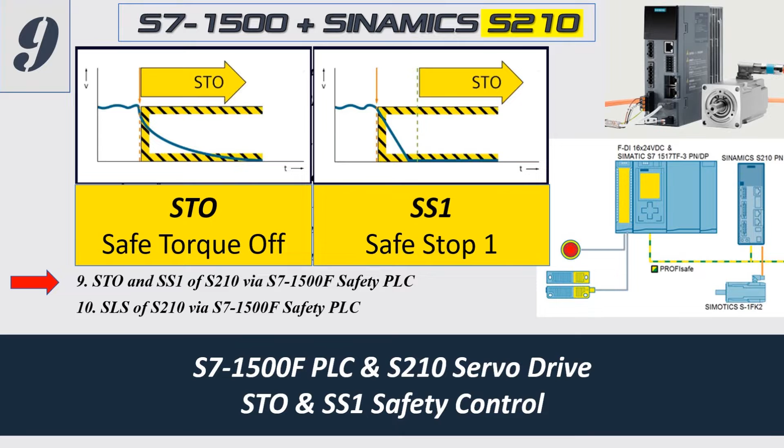In this video, I will show how we can implement the safety functions STO and SS1 for the servo drive SINAMICS S210. I will use the safety controller CPU 1511TF, a technology controller with built-in F safety.

I will use the e-stop button and the gate switch, these two different inputs, to connect to the STO and SS1 functions to control the SINAMICS S210 servo drive. Okay, let's start. So this is the demo I'm using. In this demo, I have the 1511TF controller, and I have one 1500 safety input card.

This safety input card has two inputs. One comes from this mushroom e-stop button, and one comes from this gate switch. On the right side, I have two servo drives, and I will use PROFIsafe communication to implement the STO and SS1 functions. So firstly, I will configure the safety card, which will read from the e-stop and the gate switch. Okay, let's go.

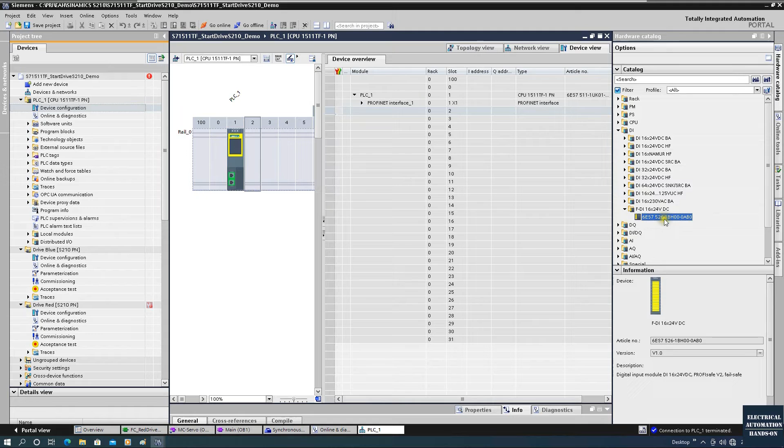On the right side, I will find the safety module. Go to the digital input and find this 16-channel safety card. This module is the 526-1BH00. I will drag it here. After I drag it here, we will see this card's address from 0 to 8. It includes 9 bytes.

That's because for the safety card, rather than just the standard signal, it also needs to communicate with the controller to exchange the status of the safety inputs and outputs. Its actual inputs include 16 inputs, from 0.0 to 0.7 and 1.0 to 1.7. Okay, then let's configure this card.

To configure this card, we really need the hardware wiring, so we need to understand the safety circuit. I will briefly introduce this. In this system, I have the e-stop and the gate switch. For the e-stop wiring, the test signal comes from US0 and goes to the e-stop. Then the signal from the e-stop, one channel goes to pin number 2, DI0, and the other goes to DI channel 8, pin 22.

That's why you see the blue and the dark gray. So this is the e-stop: the signal comes back from the e-stop button, but the test signal comes from US0. Then the gate switch internally works similarly to the e-stop. The gate switch used in this demo does not supply the OSSD function; it just works as a simple switch. So the test signal is connected to pin 11, which acts as the test signal source.

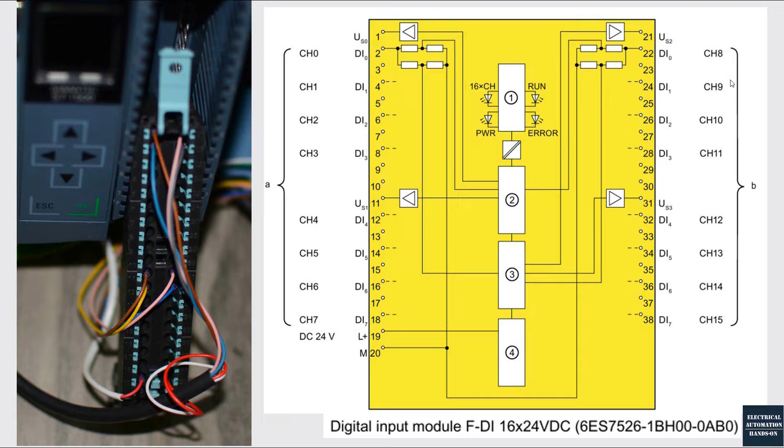When the signal comes back, it has two channels. One goes to CH4, one goes to CH12. So channels 4 and 12 are used as one group, but the test source comes from US1, test 1. For the e-stop, the test source comes from US0, and channels CH0 and CH8 are used as one group. So keep this in mind. Now let's go back to the configuration.

Let's double click this card and go to the safety properties. Let's first look at the channels here. For the input, it has 4 sensor supplies, which represent pins 1, 21, 11, and 31. Let's look at sensor supply 0. Sensor supply 0 serves channels 0 to 3. This has short-circuit testing, and we can activate it. Pin 1 at the terminal will supply the power.

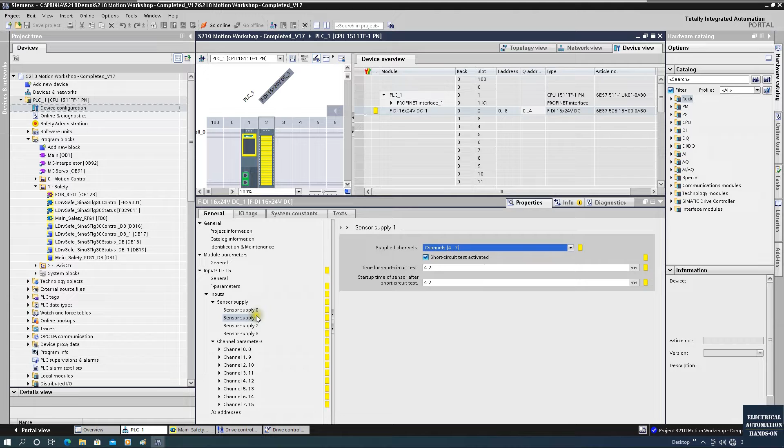Then for the second one, sensor supply 1 supplies channels 4 to 7. We activate it because we will use channels 4 and 12. But sensor supplies 2 and 3 we can deactivate, because we are not using them. We are only using supply 0, that's pin 1, and sensor supply 1, that's pin 11. Then let's go to the channels.

The first group is channel 0 and 8. Channels 0 and 8 both come from the e-stop button, but through two individual channels. To evaluate these two channels, the common way for receiving the e-stop signal is 1oo2 evaluation, equivalent. For the discrepancy behavior, we can supply the value 0; this is the common way. We can increase the time in cases where the two channels from one e-stop button cannot react exactly the same.

It has a slight discrepancy there, and this is reintegration after the discrepancy error. So usually we leave the test signal as 0, not necessary. If in the system it is very important, depending on the SIL level, in some cases you need to select this. You can leave the mouse here and you can read the help for this explanation.

Okay. And for the individual channels, we can see we activate channels 0 and 8. And the input delay is 3.2 to get rid of some noise. Channels 4 and 12 are connected to the gate switch. They are not OSSD signals. We can see channels 4 and 12.

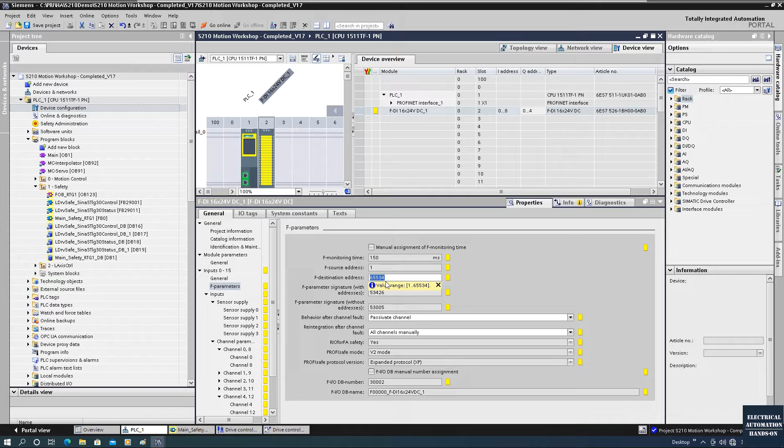So we double check this F address here. After we configure this and download while we are online, don't forget we need to right click this module and click assign PROFIsafe address. That means we will assign this address to the card. We can leave this address here. Now we can save and compile, temporarily, to see if there's something wrong with this safety card configuration.

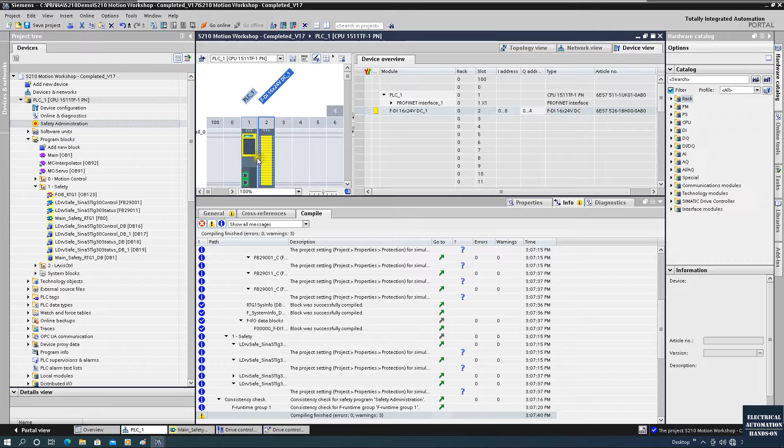As we can see, it needs time to compile. After it compiles, we will see the system automatically generates the safety administration. That's because before, the CPU basically ran as a standard CPU. Once it has this safety card, the CPU will automatically assign all the sub-function blocks serving the safety. And if we double click the properties and go to PROFIsafe, we will see F-activation is enabled. Then all those things will be automatically assigned. Okay, we finished the compile.

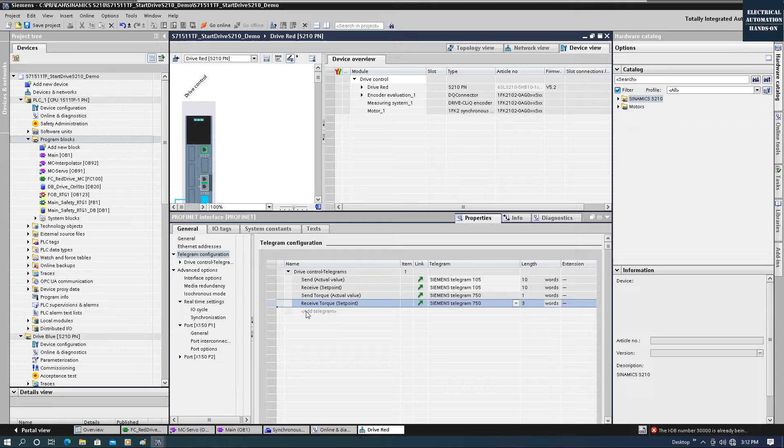Now let's go to the drive. Double click this drive station, click PROFINET and click properties. In the previous video, I showed how to add Telegram 750 for the torque. To add the safety function, we still need to add the telegram for the drive. Here we can double click and we'll see add Safety Integrated telegram. This is the standard safety telegram that includes a lot of safety functions already. So we can click this.

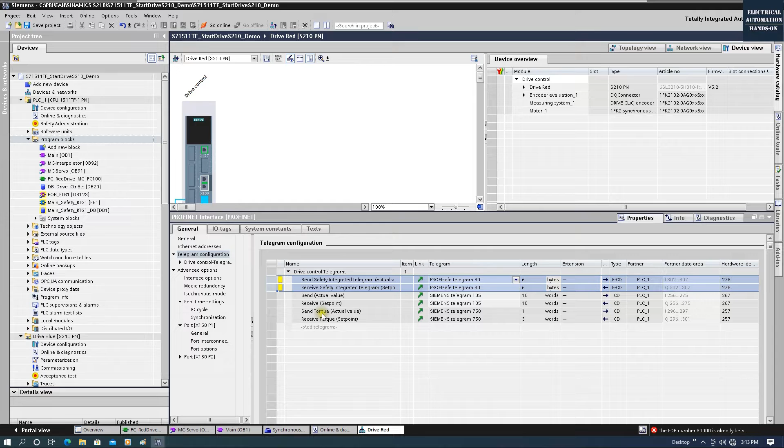In most cases, this standard safety telegram is enough. This telegram number is 30. It includes 6 bytes input and 6 bytes output. And we can look at the right side here. This is the safety input and output. It starts from 302. And then let's go to the blue drive.

Click this, and for the blue drive I can add the safety. For the blue drive I didn't add the torque value, which doesn't matter. So we can add Safety Integrated telegram 30, and we will see the system assign 308, input and output 6 bytes. We add it here, and then let's go back to the safety. Currently, the standard program and the safety program are together.

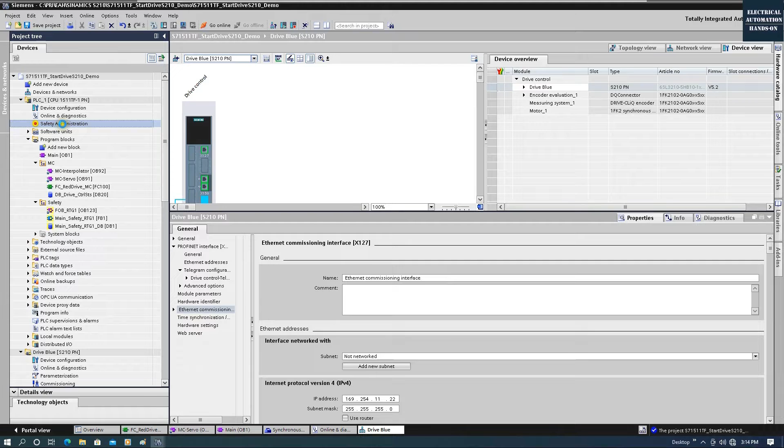Personally, I recommend we create 2 folders. We can add a new group and call it motion control, and drag all the motion control to this folder. And I will create another folder named safety and drag all the safety program here. Basically this FB1 acts as the main program for the safety program. If we double click this CPU safety administration, we can see the safety organization block is 123.

And 123 automatically calls the FB1. And the DB1, this is the safety DB. All those things are automatically assigned by the system. Okay? And you do not need to specially call this FB1. For all the safety program, you can just directly go into this FB1 and start programming here.

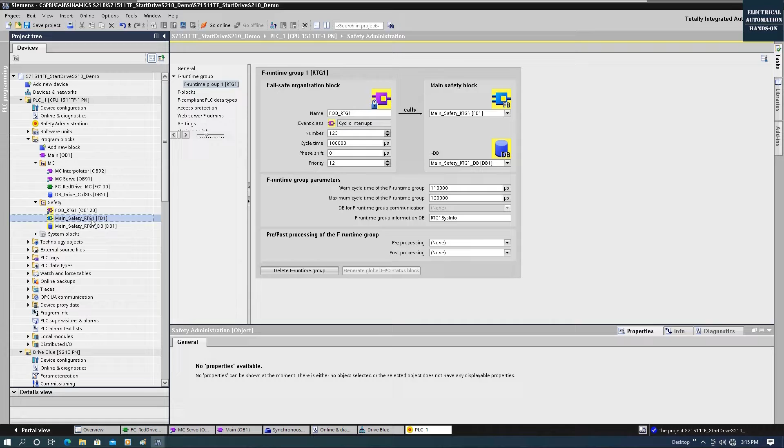By default, the FB1 is in the FBD language style. So we can go to the properties of this FB1 and change the FBD to ladder logic. Okay, and click OK. Then we'll see the FB1 is in the ladder logic style. Okay, now basically we've finished the hardware configuration.

So let's first download this controller, and we need to assign the safety address for the safety card. Okay, compile and let's download. Let's download and let's start. All right, after this, let's go to the hardware again. Then let's find this safety card. Right click, click this assign PROFIsafe address.

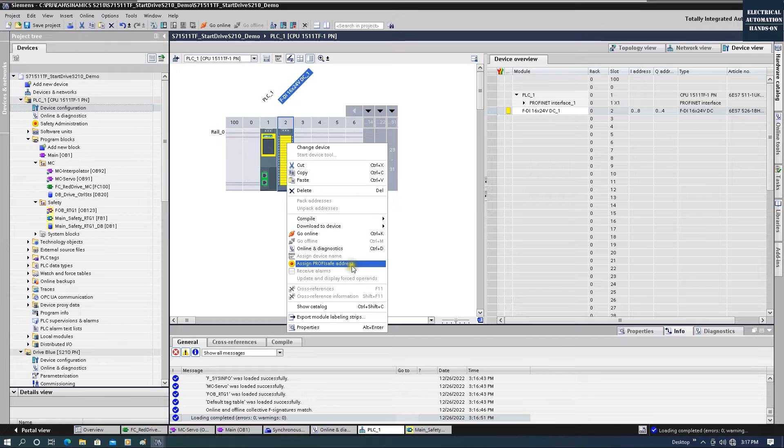Okay, so we will see. We can click this identification. Because I tested this card already, it assigned this address already. If this is the first time, then you can click this identification and find the card it's supposed to be, and click confirm and click assign. Keep in mind, you need to assign this.

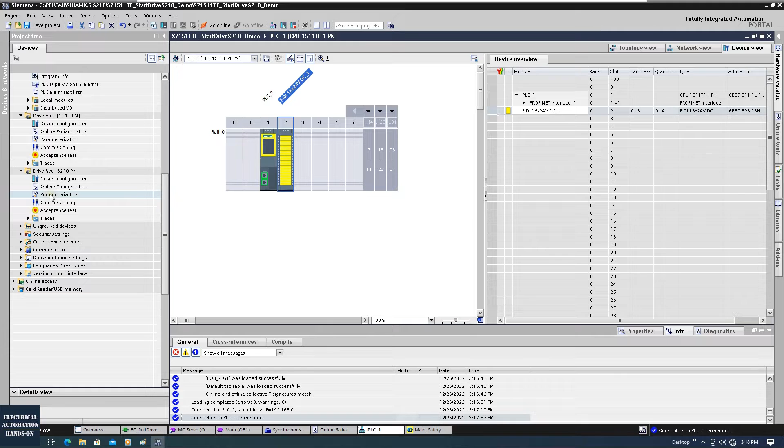Okay, and after we assign this, then we need to go to the drive and also activate the drive STO and SS1 function. Let's go to the drive. Okay, let's first go to the drive. Double click this parameter and go to Safety Integrated. So now I'm using Startdrive.

Actually, you can also use your web browser to browse your drive, this SINAMICS S210, and then use the web browser to activate the safety. They work the same way. Okay, so here I will use Startdrive to configure this red motor, and I will use the web browser to configure this blue one. Okay, here let's double click this parameterization, go to Safety Integrated and click here,

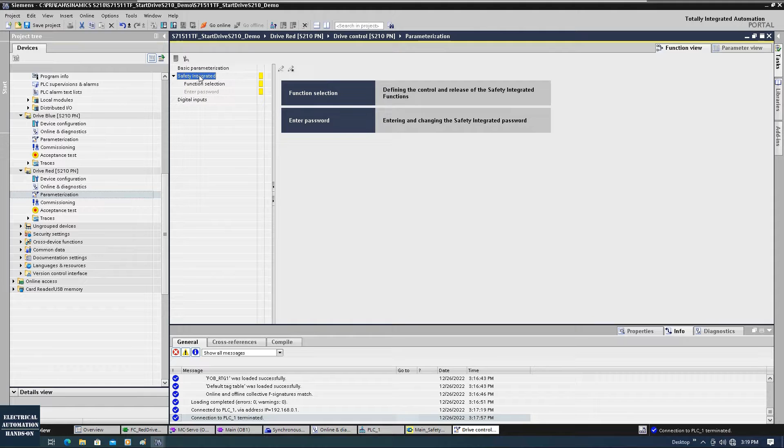and then let's click go online. While we're working in Startdrive, for the Safety Integrated configuration, we are configuring this drive online. So now we can click edit. Okay, click edit. By default, the safety is disabled. So let's go here, click basic functions.

We will first implement the STO and SS1. STO and SS1 belong to the basic functions. They do not need any additional license. This is a built-in function. We just need to enable that basic function. Okay. And we are using PROFIsafe.

If you are using the onboard terminal, as I introduced, the drive has two-channel safety input, so you can use the onboard terminals. But in this case, I'm using the safety controller, this F controller, so I'm using PROFIsafe and the STO and SS1. So now we can click this button to jump to the configuration.

As we can see from this chart, the key difference between STO and SS1 is this. STO is very easy to understand: safe torque off. Once the safety signal command goes from on to off, basically we press the e-stop or open the gate, then the torque will be off. But while the torque is off, the drive will coast down freely by itself. For most applications, we do not want this. We want a safe immediate stop, meaning the system controls the motor to stop as quickly as possible.

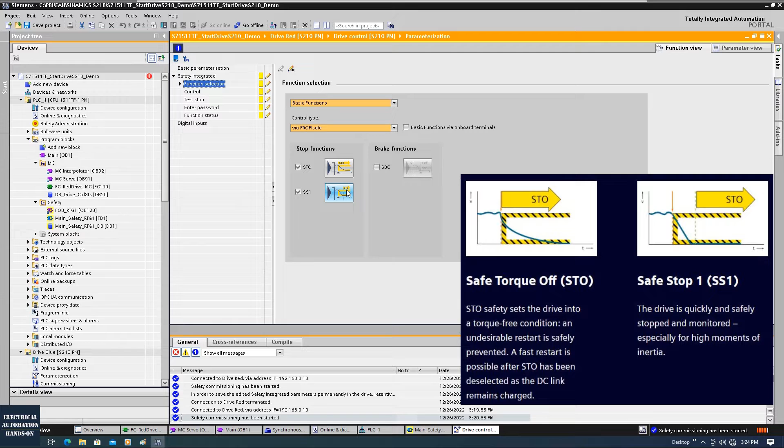This feature belongs to SS1. SS1 works like this: first, for a short moment, the system will stop the motor as quickly as possible, and then it will switch to STO and shut off the torque. As we can see, this controlled speed ramp-down is a short moment. So once we go to SS1 here, we will see there's one setting.

This setting basically means how long a time we assign to do the immediate stop. For example, we can set 0.5 seconds for the immediate stop. This 0.5 seconds works for the SS1. After the SS1, it will do the STO function, torque off.

Usually we leave a short period, basically half a second or 1 second, depending on the moment of inertia of your load. If your load is very heavy, you probably need a longer time. If your load is very light, you can set even 0.1 or 0.2 seconds. Again, this time is for SS1 to immediately stop. After this time, it will apply STO, safe torque off. Okay?

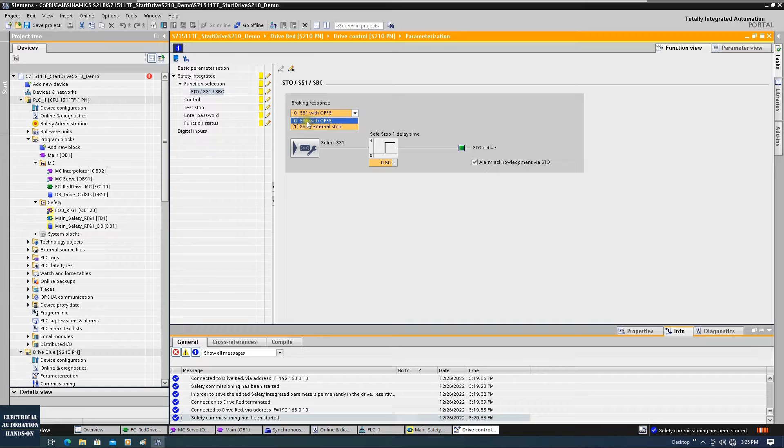Okay, we can see this selection. We usually leave it at 0: SS1 with OFF3, immediate stop. Okay, go back to here. So actually, once you click this STO or this, they both go to this option. So no difference. All right, then let's go to the control and quickly review.

This means if the communication fails, what should the drive do? It should do the STO or do the SS1. In some cases, if the communication dropped, the drive should immediately stop. Otherwise, that means we totally lose control, right? So I personally recommend that we do the SS1, to make sure that if the communication drops, the drive immediately does the SS1, the immediate stop.

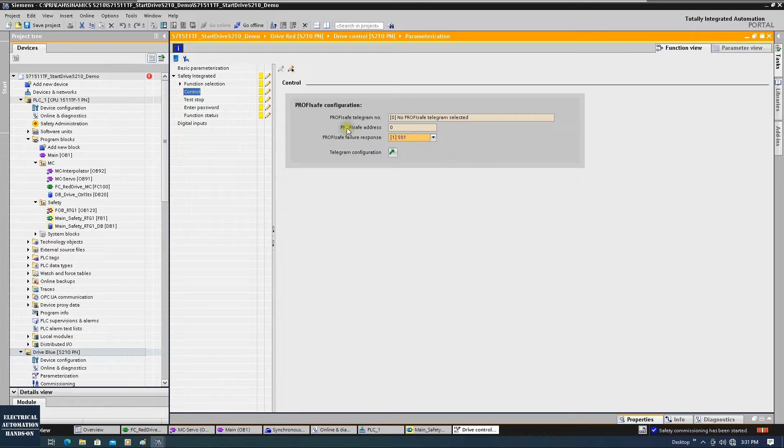Okay. Then there's one address you need to be very careful with, this PROFIsafe address. By default, that's 0, and it comes from P9610. Okay, you'd better write down P9610. This is the PROFIsafe address. So where does this PROFIsafe address come from? If we click this button, Telegram configuration, it actually jumps to the hardware configuration where we configured this Telegram 30.

And under here, if we click this send and receive with the red and yellow mark here, we will see the system assigned this address for the red motor, that is 1. Okay, so ideally this PROFIsafe address should be 1. I will download this station afterwards to make sure this 1 is written into the drive, or we can manually change this address in the drive. Okay, so this red motor needs to be 1.

So we could go to the parameter view and find P9610, this address. Okay, this is the red drive, so we can change this 9610, the safety address, to 1. Okay, so we change this online, and once we come back here, we will see this PROFIsafe address has changed to 1. Now we find the telegram at the top is still showing 0. So we need to change this telegram to 30 also.

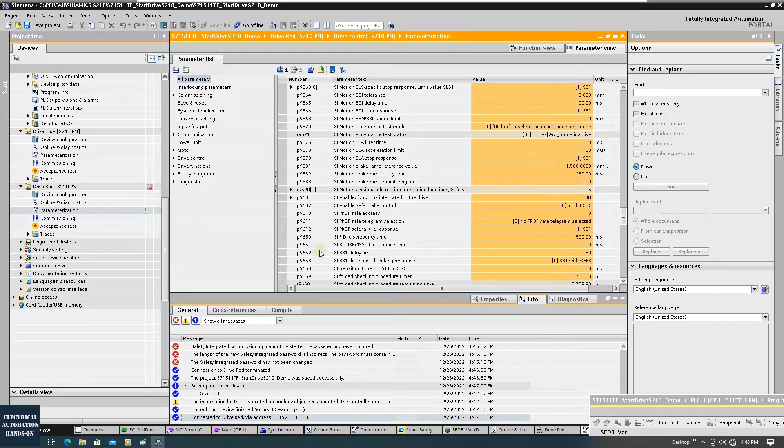So let's go to the parameters and find 9611, and change the telegram to 30. But by default, we cannot directly change P9611. We have to go to P10 first and change P10 to 95 to make the safety commissioning mode active. So let's go to P10 first, change P10 to 95, and then go back to P9611 and change this telegram to 30.

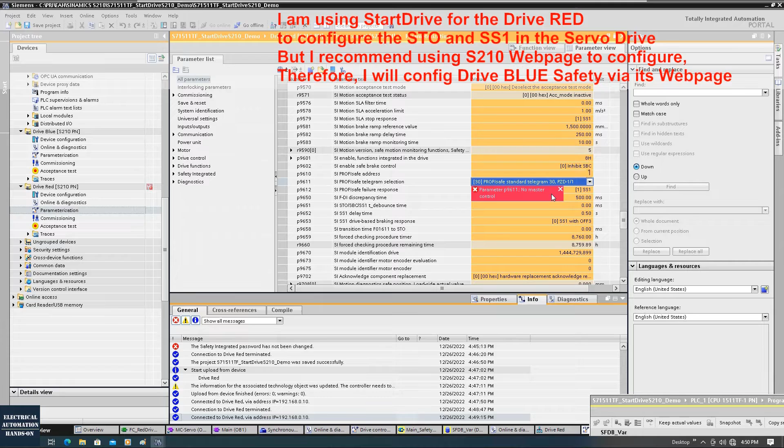After we finish P9610 and 9611, once we come back, we'll see online it changes to telegram 30 and the address changes to 1. The test stop: this is the time, a counter behind to check. During this time, if no safety stop happens, after the time expires it will force you to do a safety test to check that the safety is still working properly. This is basically a safety standard behind it. So you can leave a couple of weeks or 1 year, one test needed each time. This depends on what your application requires.

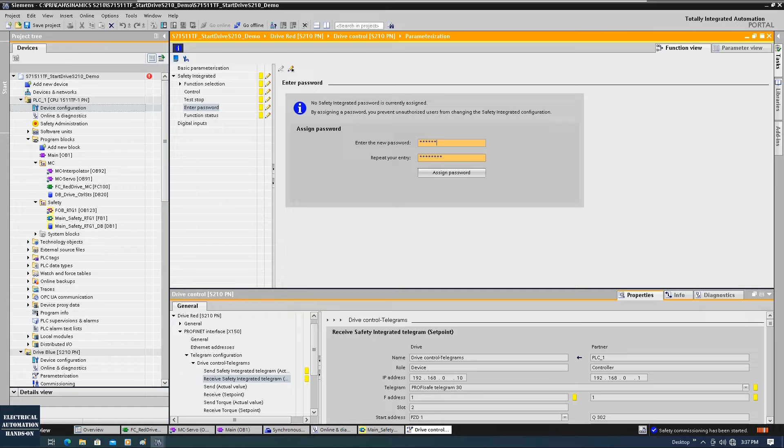Okay, so 8,760 hours here for the test stop. Password. In some cases the drive will force you to type in the password, and personally I also recommend you write down the password and set the password here. So I can change it here to 1 2 3 4 5 6 7 8 and repeat 1 2 3 4 5 6 7 8. Again, I'm online and I enabled editing, so everything I'm operating here is directly written into the drive. Okay, I changed the password, and then let's go to the function.

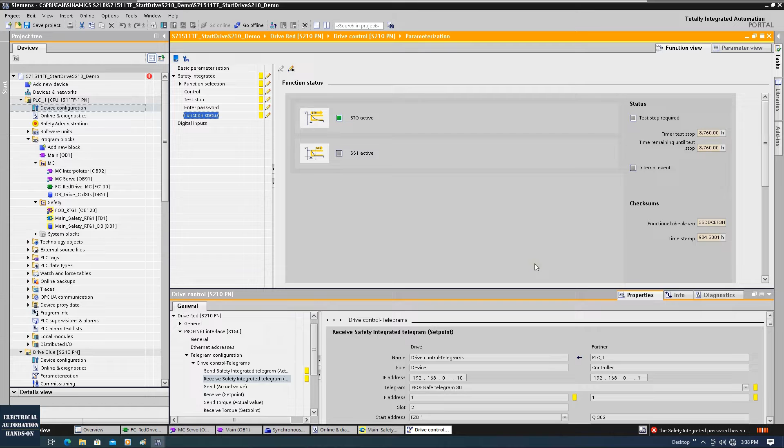Okay, at this function status, we can monitor the safety status online. Currently, we haven't programmed it yet, there's no safety enabled. That's why STO is active and it's stopped. So we need to program the logic. And in case you are using the safety terminals to implement the safety, you can change the parameter here. But here I'm using PROFIsafe. Keep in mind, if you are going to use the terminals, then you can select onboard terminals. But now I'm selecting PROFIsafe.

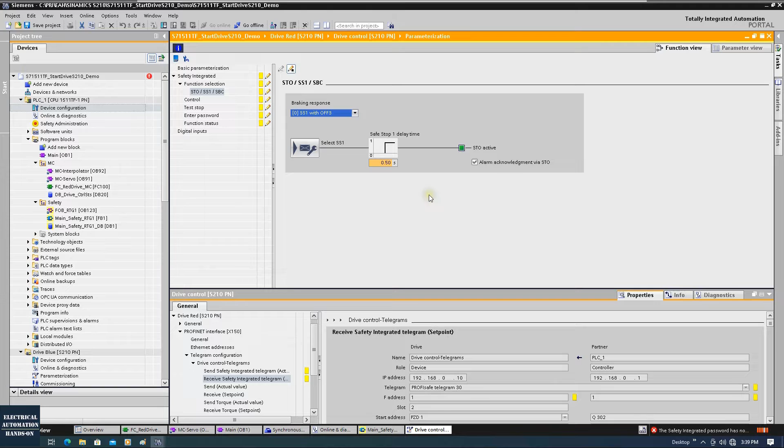Okay, after we finish everything, we can close the processing. Okay, and then click this save RAM to ROM to make sure all those settings are saved into the drive. Alright, we just finished the red drive.

Then for the blue drive, I'm going to use the webpage to configure it, and then we can upload. So we can use the IE browser, and we'll see we can browse the blue drive. The IP address is 0.11, so we can browse 0.11. Okay, let's browse the IP address of this blue drive, and then let's log in. Administrator. Log in.

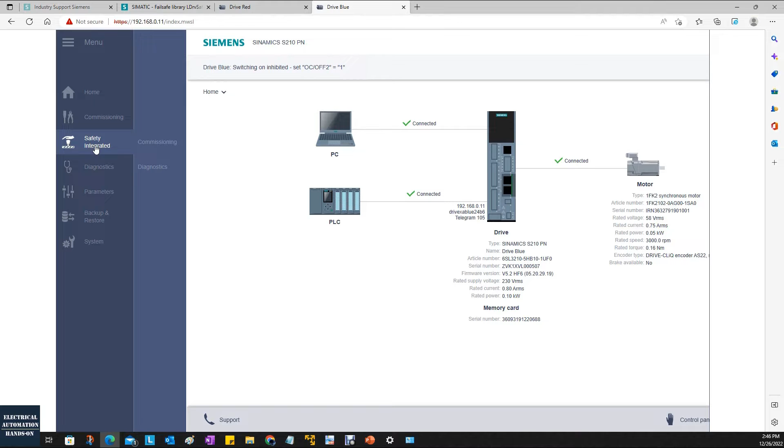Okay, we log in into this blue drive, and then let's go to the Safety Integrated, and let's go to the commissioning. Okay, and then let's select this basic function. Basic function, the STO and SS1 are all default selected once we enable this basic function. And we are going through this PROFIsafe.

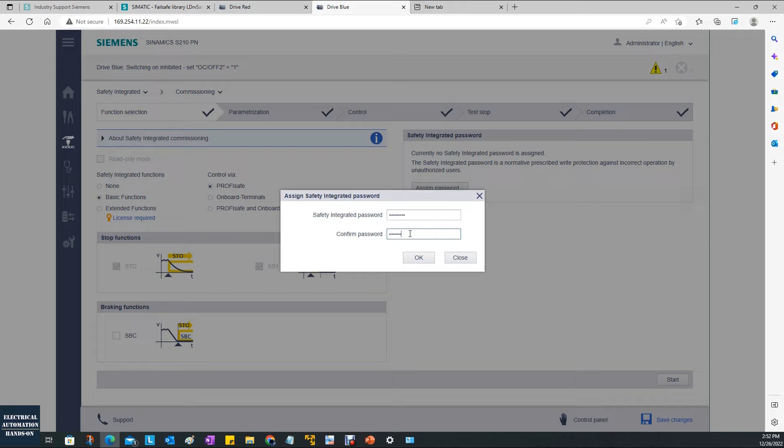Okay, and then we can assign a password. 1 2 3 4 5 6 7 8. 1 2 3 4 5 6 7 8. Assign the password. Okay, and then let's go to the parameterization. Click this start. Okay, and this is the time difference. So we set 0.5 for the red drive. So we can also set here.

Keep in mind the unit, this is the second. So we can set 0.5 second. So here, that's actually clearer than the Startdrive. We can see the 0.5 this time is left for the SS1 to stop the drive. And after this, then it will run the STO. Okay? This is the parameterization. Okay, 0.5 we set here.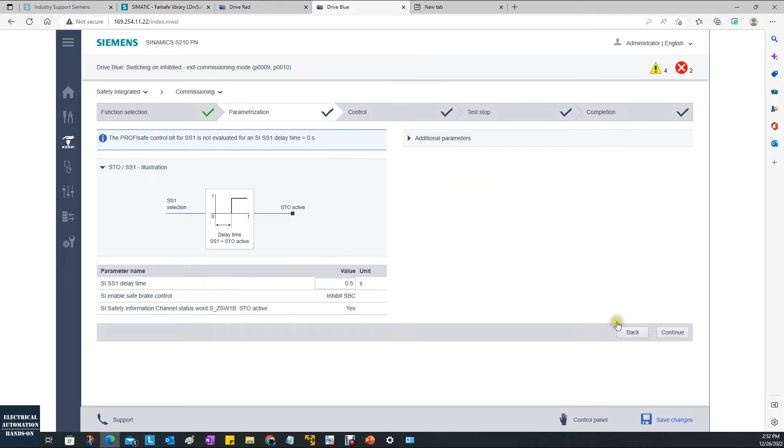And then let's go to the control. Click this continue. Select this safety telegram 30. And from here, we can directly set the PROFIsafe address. So 2, where does this 2 come from? If we go back to the program, and this is the drive blue, okay, PROFINET port, and go to this telegram, the safety telegram, this is 30.

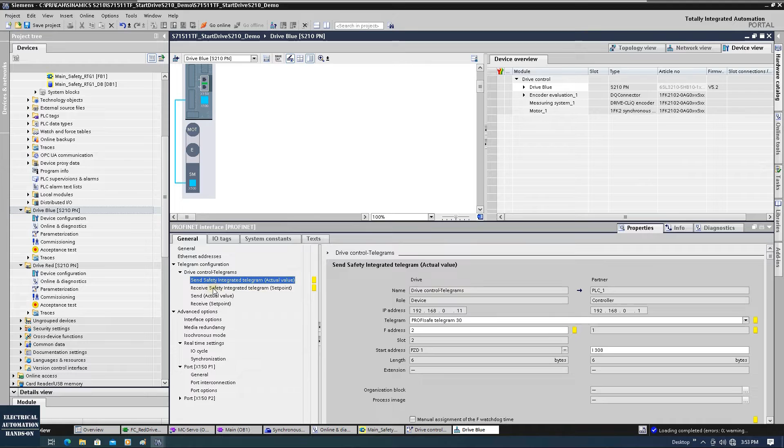And the safety telegram send and receive, we can see the drive side, the safety address, that's the 2. So we can assign 2. Go back to here, the safety address, we leave 2 here. And same thing, for the PROFIsafe fail response, we can switch to the SS1. This is used to immediately stop the drive if the communication fails.

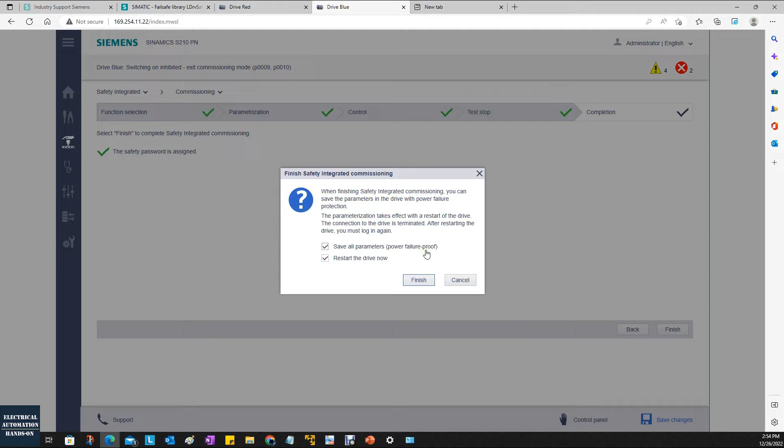Okay, then let's click continue. And this is the test stop. So we can leave the time, basically the maximum time, okay, for the test. This is the test stop. Then let's click continue. Basically finish everything. And here the system will pop up this, save all the parameters. That means copy RAM to ROM. Let's click this finish. This is using the web page to configure the safety.

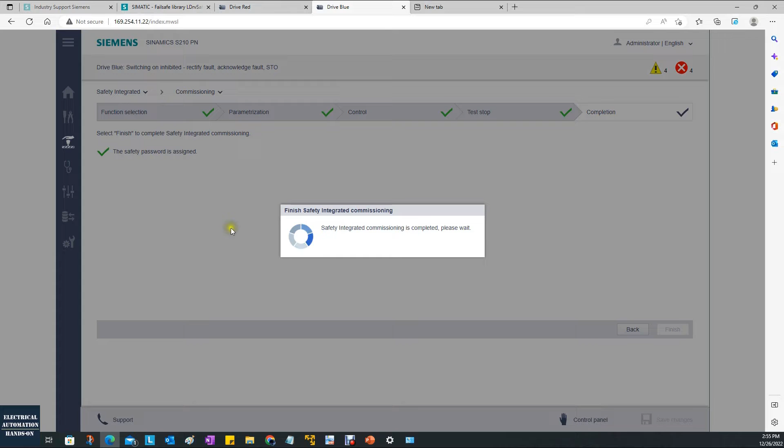Okay. Here, compared with the red drive and the blue drive, I would recommend using the web page to configure the safety for the SINAMICS S210 drive. You will see the web page will provide more information. It's user-friendly. Alright, we finished the configuration. Then let's go back to the TIA Portal.

At the TIA Portal side, we can right-click at the blue drive, and we can click this upload from device to upload all the configuration to this TIA Portal Startdrive project. Okay, I will click here, click this upload from device. Okay, same thing, I will also do the red drive upload.

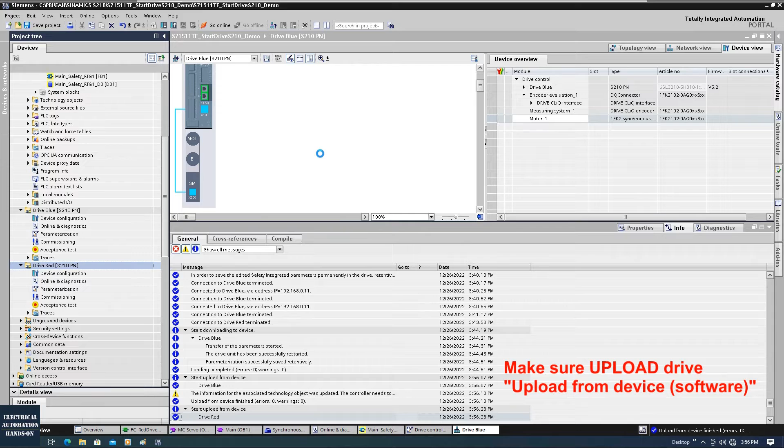Alright, so now if I go to the safety parameterization from this blue drive, and if I go online, I can online monitor if all the parameters showing here are the same as the web page we just did. So we can go online and go to the control, and we can see the PROFIsafe address has changed to 2 already. And that's just one configuration.

And all the configuration is the same as we did in the web page because we uploaded all the parameters. The 0.5 we set from the web page. Okay, this is the blue drive. Okay. And also because we uploaded the parameters, now if I shift to offline, both offline,

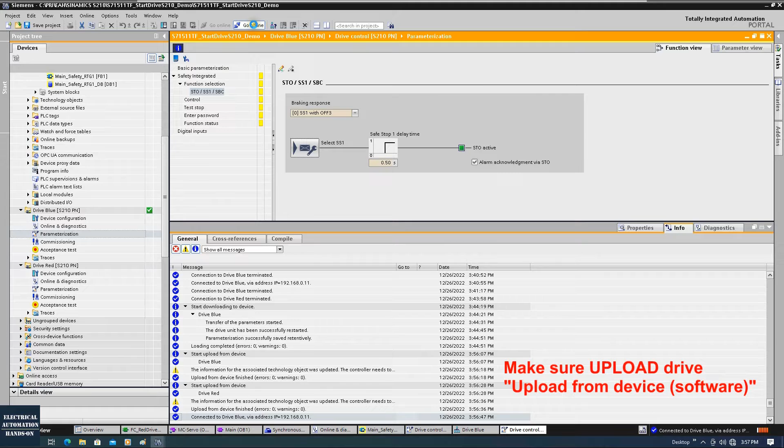from the red drive, if I go to the parameterization, if I go to this offline status, go to this configuration, we will see all those configuration statuses. They are matching with what we set online. Okay, the PROFIsafe. Okay, and the SS1 time 0.5.

Okay, now basically we finish all the hardware safety configuration. We finish the PLC safety hardware configuration and the safety address setting. And also we finish the Startdrive, to set the STO and the SS1, this basic function. So the basic safety function. Then let's shift to the safety program to control the STO and the SS1 command.

To show the safety program, I would highly recommend you go to the Siemens support website. Let's browse one application from support.industry.siemens.com, and you can search this ID 109485794. Okay, this ID number. And you will see this is a library to implement the Siemens drive safety. Okay, and basically using Telegram 30, it provides us the status and the control command.

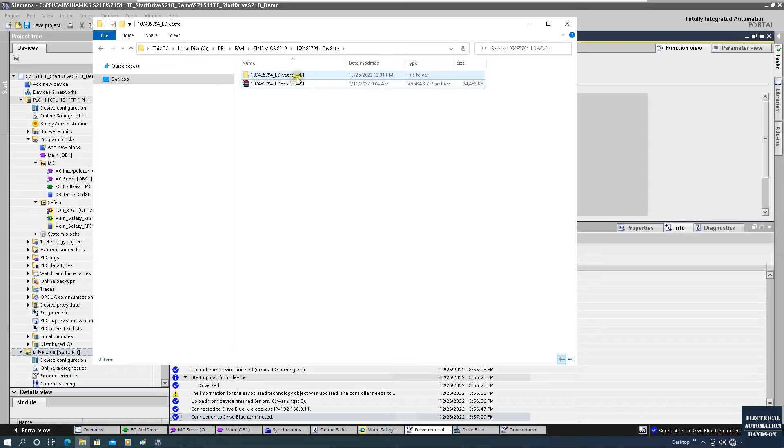Okay, so let's download the manual and let's download this library. And I will show how we can use this library. Okay, go back to our program. I copy this downloaded library into this directory, and I will call this library. Keep in mind this is a library, so from the project, from the right side here, I will click this Open Global Library.

Okay, let's go find this library directory, and we will see this full name. Okay, we will see this library is based on TIA Portal version 16. Now we are using version 17. Okay, click open. It will automatically upgrade to version 17. We are opening the TIA Portal version 16 library version. So let's click this upgrade.

Okay, we import this library. And then let's open this library, and we will see this library based on the controller we are using. We could use the S7-1200F or 1500F, so we'll use the 1500F. Go to the general and go to the PROFIsafe control. It has control word telegram 30 and status word telegram 30.

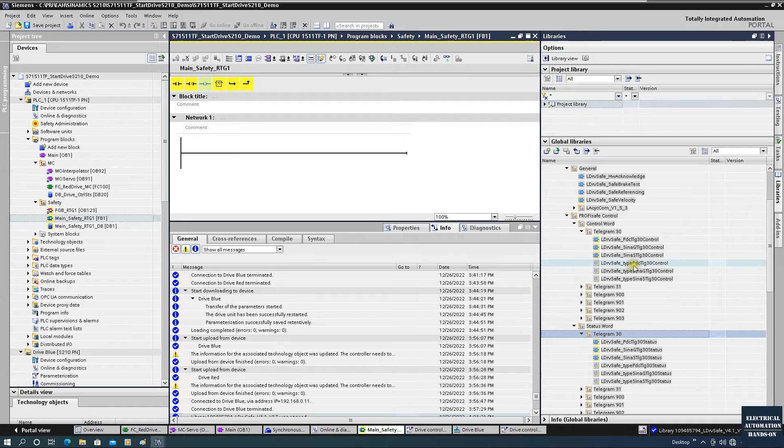Okay, again, the block we will use is under the 1500F, and we will use the telegram 30 control word and the status word telegram 30. Okay, then we need to copy. So firstly, let's go to the function block here. Here we will program something. So open the library and let's drag the control command.

The control command, look at this word. This is for S. S means the SINAMICS S series servo drive controller. For control, we will use this function block. Drag to here. The first one is based on the red drive. Okay, this is used to control the red drive. Click OK. Okay, and this is the control.

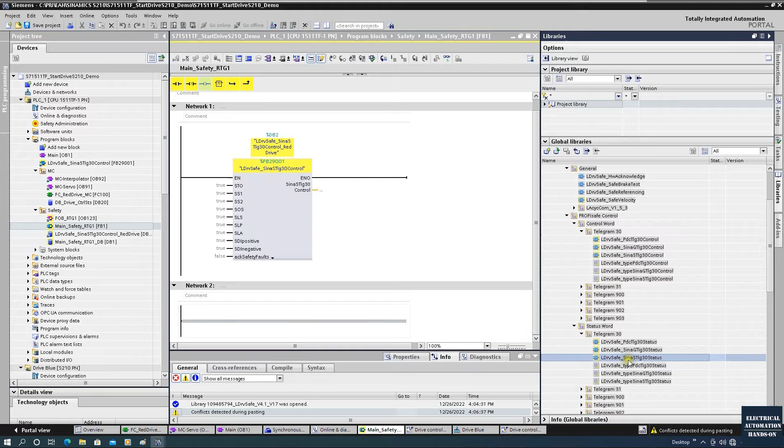Then for the status, we go again to the S, this SINAMICS S status. Let's drag to here. In the meantime, we will see the system automatically copy this instance FB to here. Okay, and this status is also based on the red drive. Okay, and we can write something here. This is the red drive safety control. And this network 2 is the red drive safety status.

Okay, other than the control and the status function block, we also need this UDT, this structure. That's because the status input here needs this status UDT structure. And for the control, the right side here needs to connect to the Q address, so that needs this telegram 30 control UDT. So we need to copy this UDT to our project.

So the PLC data type here. We can drag this control UDT to here, PLC data type. Okay, and for this status, keep in mind, we need to drag the correct one. We drag this S telegram 30 to here, under this PLC data type. Okay, then we can go to the variable list, the PLC tags. Show all tags. We need to assign the safety input and output based on this data type.

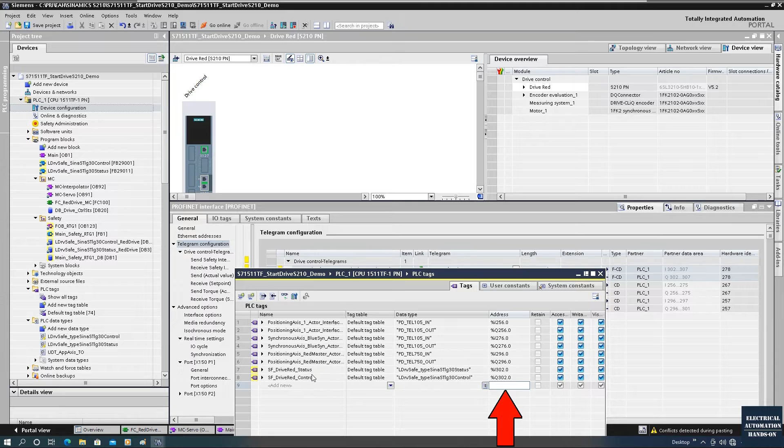So the status needs to come from input 302. Change to input 302. And for the control, I need Q302. Okay, so this is for the red drive. Then let's shift to the blue drive. Double click. We'll see the blue drive starts from 308.

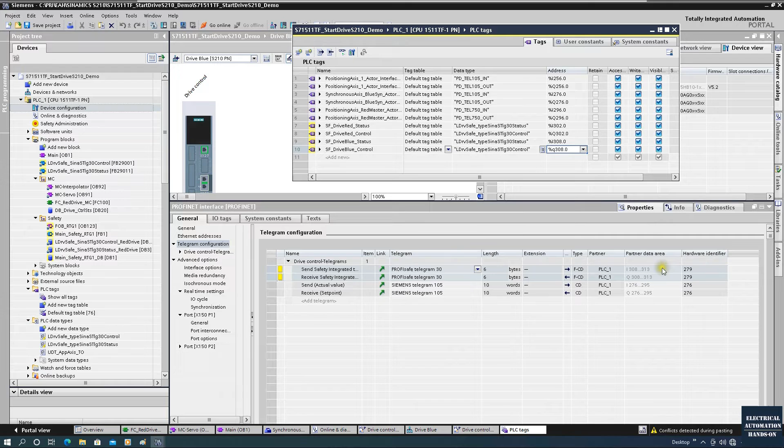So for the blue drive, SF drive blue status, based on the status data type. The status is the input, so this should be I, with starting address 308. And then SF underscore drive blue control, based on the control data type, and that should be Q308. This comes from the Siemens standard structure.

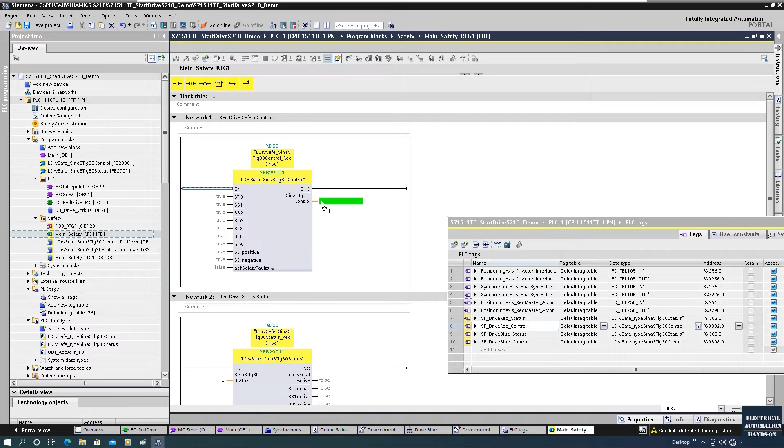All right, after we configure this, we go back to the program. For this control function block, the output should be the Q address for the red drive control, Q302. So we drag to here and release. And for the status here, the status of the red drive is the input, so drag to here. Okay, this is for the red drive.

Then let's program for the blue drive. For the blue drive, we will call the blue drive control, drag to here, and it automatically assigns. So change this to blue drive.

Blue drive control. This is the blue drive safety control. And again, this blue drive safety control, that's the Q address. So we'll drag this blue drive control to here. Okay, and then network 4, I will drag this status to here.

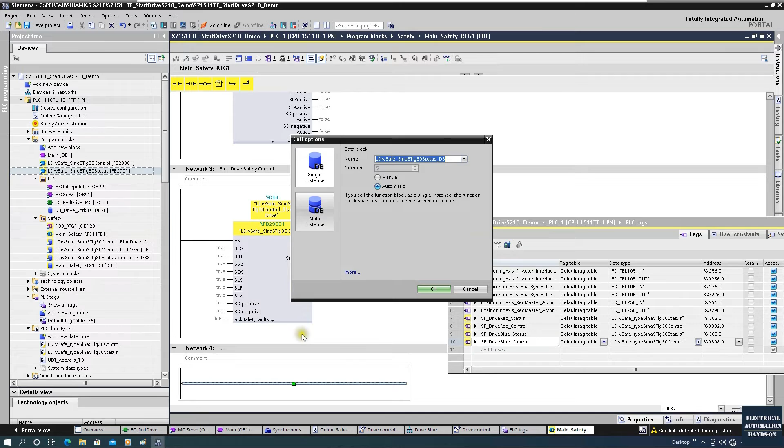And it automatically assigns this DB number; change this to blue drive. And this input should be the blue drive status input. Drag to here. All right, we can change this network 4 to blue drive safety status. Other than this, we also need to program one system integrated acknowledge for the fault.

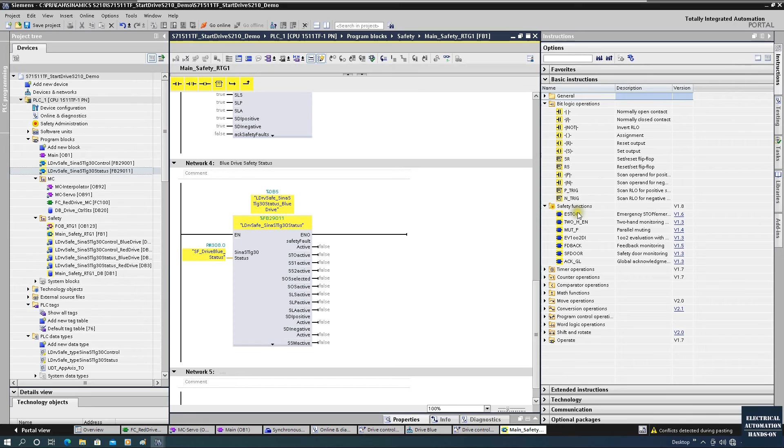Let's go to the right side library, to the instructions, and find the acknowledge. Drag this acknowledge. So this acknowledge is used to reintegrate the system after cycling power or anytime the safety has something wrong, so we can acknowledge the safety fault.

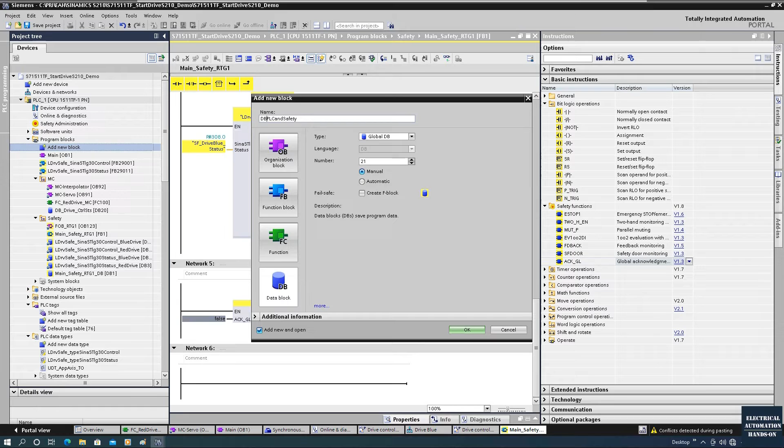And this acknowledge can be connected to one HMI button, so we can create one DB. We can name this DB the standard DB; this is a standard DB for the PLC, not the safety. In this standard DB, the first one is the safety acknowledge push button. Drag to here. This is the system level acknowledge push button, ACK.

Then let's program the eStop function block. Drag the eStop to here, and name it eStop DB. This eStop input comes from our digital channel input 0.0, because 0.0 is receiving the eStop button signal. So we can name this input the real eStop signal.

eStop push button. Here, the acknowledge necessary is equal to true. That means after we press eStop and release it, we need one acknowledge signal, then the output will change to 1. 99.9% of the time we need to leave this true. Otherwise, once the eStop button is released, the Q will be on directly. This is dangerous, so we need one acknowledge signal.

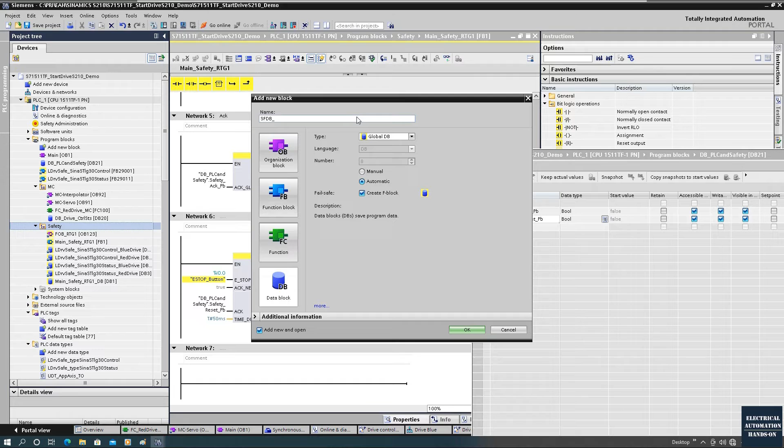We can create a DB here: add block under this folder safety, click data block, and this time check create safety data DB. We can name this safety DB SF DB. And the variables: acknowledge, and here we can name this eStop button Q, and the second, gate switch Q.

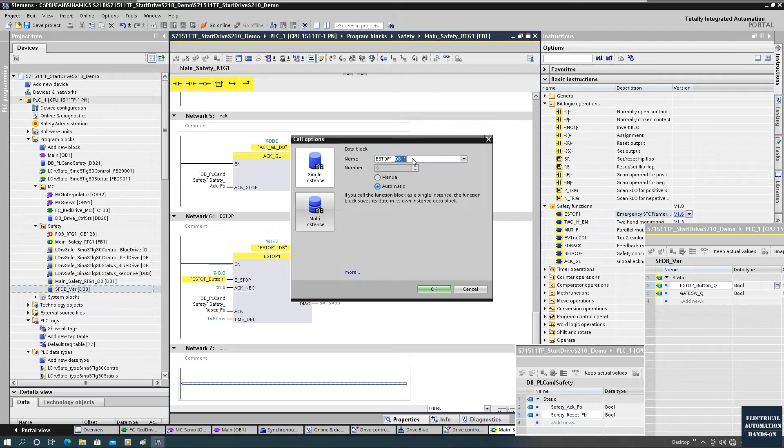And we can drag this eStop button Q to here. This is the eStop. Then let's program the gate switch. The gate switch does not supply the OSSD function, so it only runs like a switch, similar to an eStop. So we can still drag this eStop function, and name the instance gate switch. Click OK.

For the gate switch we can use input 0.4. Then we rename this as gate switch. To show the difference between acknowledge necessary or not, I will leave acknowledge necessary as false. We will see as long as we close the gate, the output will be on without acknowledge needed.

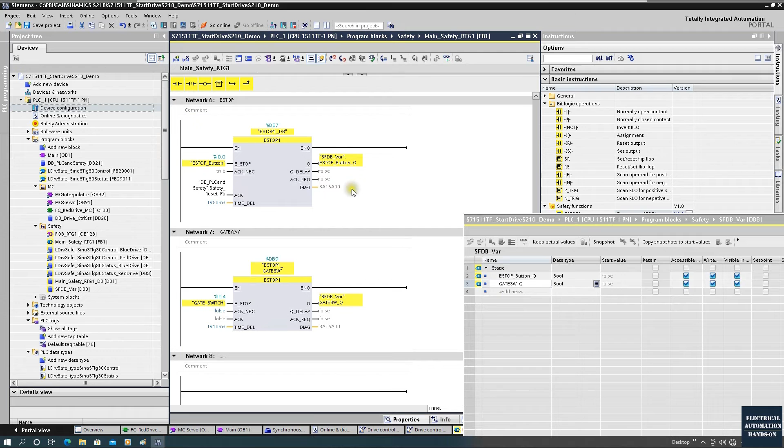The time delay we can leave as 0 or set very short, 10 milliseconds. And the Q, we drag this safety DB Q and give the output here. Then those two Qs can be used as commands. Then let's go back to the safety function block.

For the STO and SS1: for the STO, as long as the E-stop is pressed, we need to do the STO, right? So we use the E-stop, and same thing, if the gate opened, we also need to do the STO. And for the SS1, we only need the E-stop. If the door opened, then we need to do the STO, the safe torque off.

Same thing for the blue drive. For the STO, the gate switch and the E-stop. And for the SS1, we only need the E-stop.

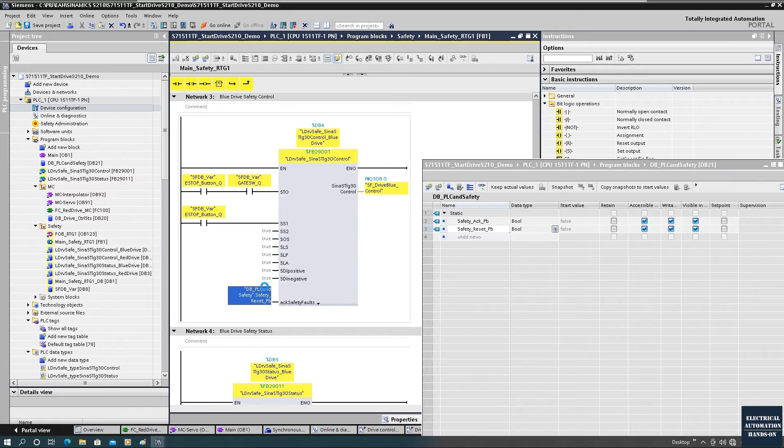And for the SS1, we need the E-stop. Okay, so we execute this. And we will see here, there's one acknowledge safety fault. So we could drag that acknowledge button, the reset signal, to here. So we can drag this to here, acknowledge. So reset.

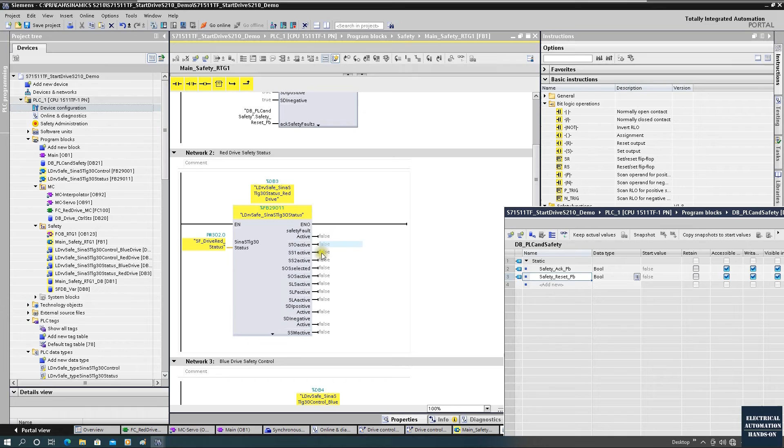Okay. And from the output, we will see the output. Without any connection here, we can still see the status. So in the real case, we can program some safety output status, drag to here. We will see if the E-stop is pressed or the gate opened, so STO active or SS1 active, then the output will be on. On means the system is in safety mode. Safety stop the machine. So we can show on the HMI with a yellow or a red indicator when this active turns on. So now we can download the safety program.

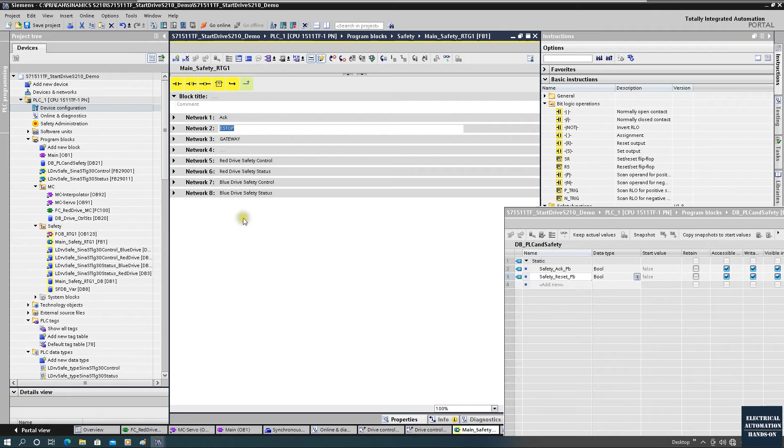Before that, all our commands are below the control command. This is not quite good. So I will reorganize this sequence. So I will close all the networks and drag number 1 to number 4 to the bottom. Okay. So acknowledge, E-stop, gate. These are the commands reading the signal input, and those function blocks are used to control the safety to the drive. Okay, now we can download all the safety program.

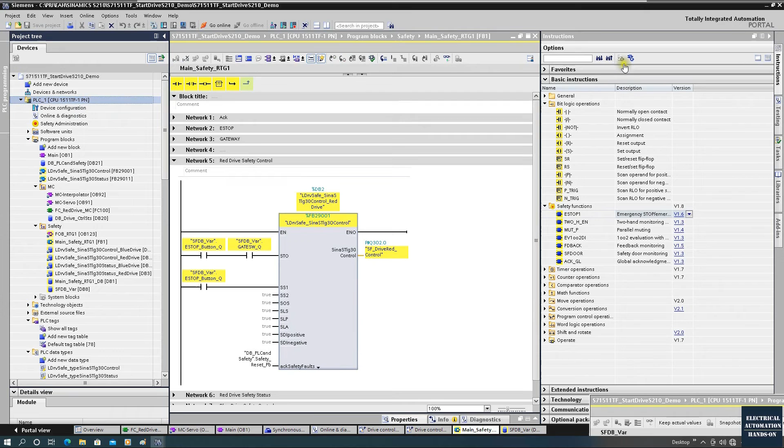All right, now let's download this entire project. Compile and download. Okay, let's download. To download the safety, we need to stop the CPU. Okay, let's stop. And let's start the controller. Okay, after we download the CPU and download Startdrive, or basically configure the STO and the SS1 from the drive side, I recommend you cycle power the entire system, or at least cycle power the drive. So let the system cycle power and restart again.

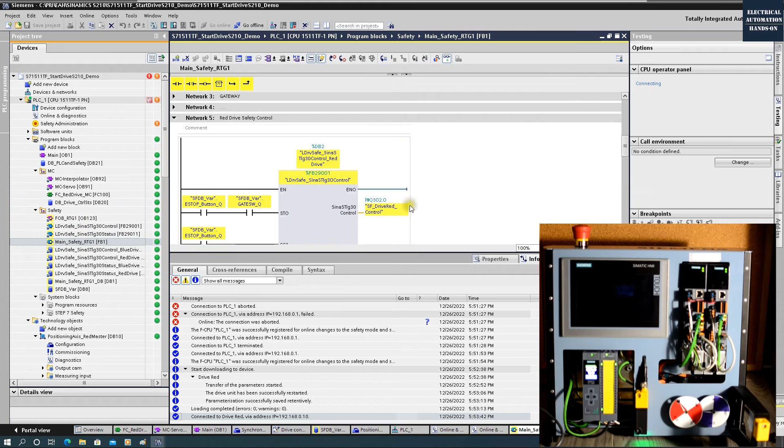Okay, after the system boots up, we will see the drive, the two drives on the right side show green, but the controller shows an error. But don't worry, that's because after the system powers up, we haven't acknowledged the safety yet. So we need to go to the program and acknowledge the fault. Basically reintegrate the fault. So we will see both signals go off because we haven't acknowledged the safety yet. So we need to acknowledge. Once we acknowledge, the error is gone.

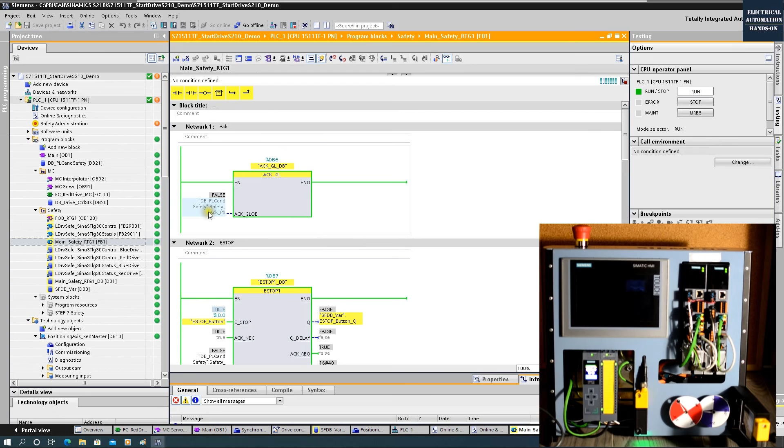So keep in mind, in the safety program, you need to use this acknowledge global to acknowledge the fault. And also for each E-stop channel or gate switch channel, if some channel needs acknowledgement, like here, even though the E-stop signal is on, this channel needs acknowledgement. So it's waiting for us to acknowledge this. Usually this one can be left on the HMI, so we can acknowledge on the HMI. This one usually comes from the physical button to acknowledge the safety fault, basically used for maintenance. So this is called reset, this is called acknowledge, safety acknowledge.

Okay, so this one I can acknowledge. Once I acknowledge this channel, we will see the Q will be on. Then the gate switch, and here, okay, the gate is opened. If I close the gate, we will also see the gate will be on. Okay, I will close the gate. Okay, so now all the safety is okay. And when the safety shows okay, the output here shows off. So basically when they're on, we can show a red indicator showing an error on the SS1 or STO; off shows the safety is now at OK status.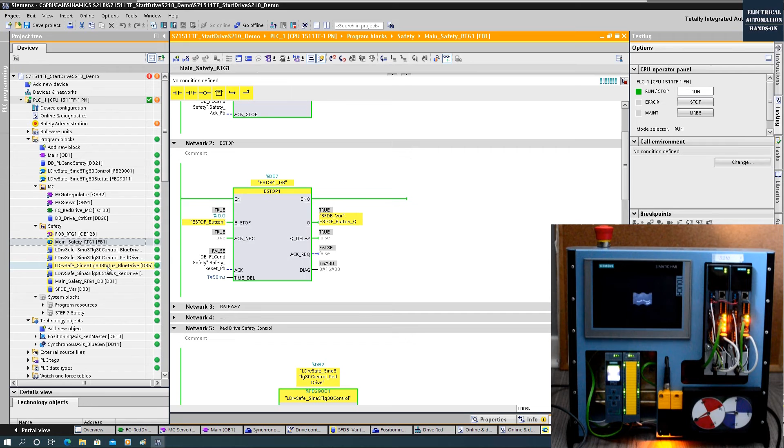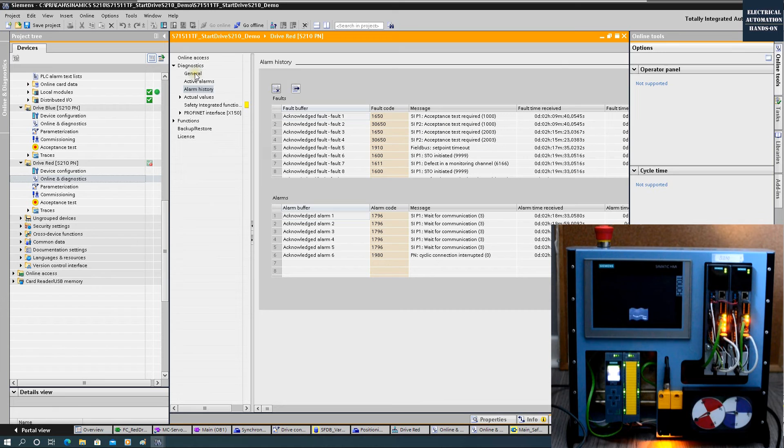At this moment, if you see any fault from the drive, you can go to the drive, open the online diagnostics, and see the active alarms. Sometimes at the very beginning, the first time, the drive wants to have STO in on status. It's basically asking you what the correct status should be. So definitely on for the STO should be the correct status. Then we can acknowledge the fault. For example, in this system, I had this acceptance test and STO initiation required before. So after I turned the STO signal on and cycled power, the system was okay.

Okay, now all the safety shows okay. I can turn on the drive. I can go to the red drive and power on the drive. Okay, I can power on. And now I can spin the motor. Okay, no error. And I can fire the motor. Okay, it is moving. And now if I press the E-stop,

so we can monitor the safety program. Let's look at this red drive safety output here. Okay, if I press E-stop, all right, we will see the STO and SS1 are all on. On means it's not okay. The STO and the SS1 are active, the safety stop. Okay, and let me release.

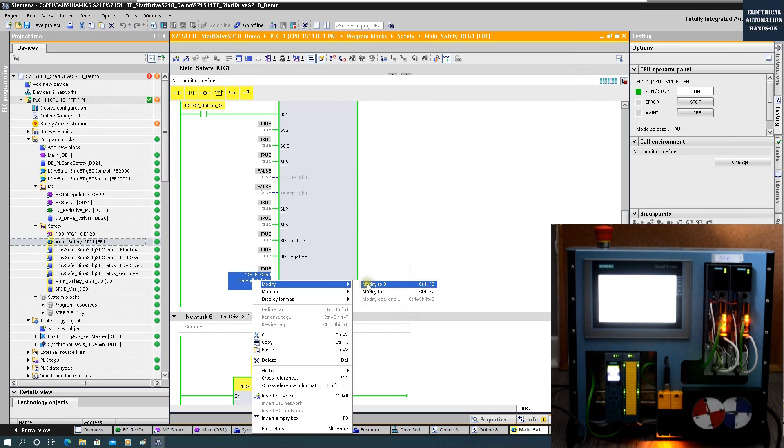So after release, we haven't acknowledged yet, so the system still shows the stop status. So let's acknowledge. Okay, after acknowledging, we will see the system go back to the normal status. Now, let me go to the program again. Now, let's power up again.

Okay, I need to reset the drive, reset this axis because we hit the E-stop. Okay, reset and power on again. Okay, we power on again. And now let's fire the drive with a faster speed. Okay, so I'm gonna set very fast. 10 times. Okay, and let's fire. Okay, now the drive is running very fast.

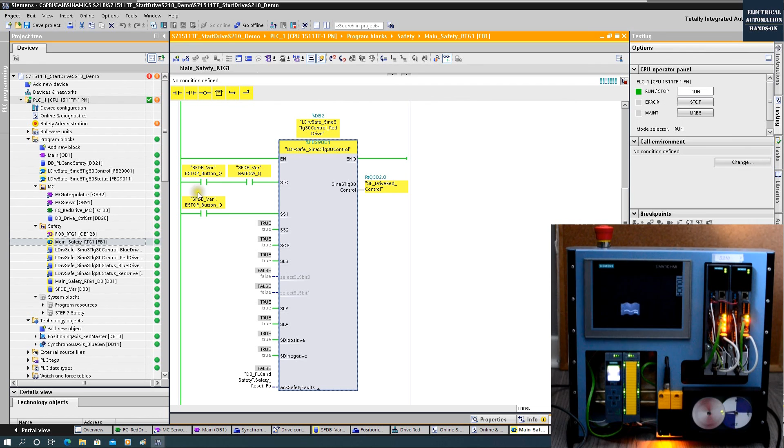The reason why I'm running very fast is because I'm going to open the gate, and because this is the STO, opening the gate will only fire the STO, so we will see it coast down. So if I go to the safety, we will see the gate switch, once it's off, will fire the STO only. The e-stop will still be on. So once the STO goes off, we will see the STO will be active. Then the drive will slow down, will ramp down.

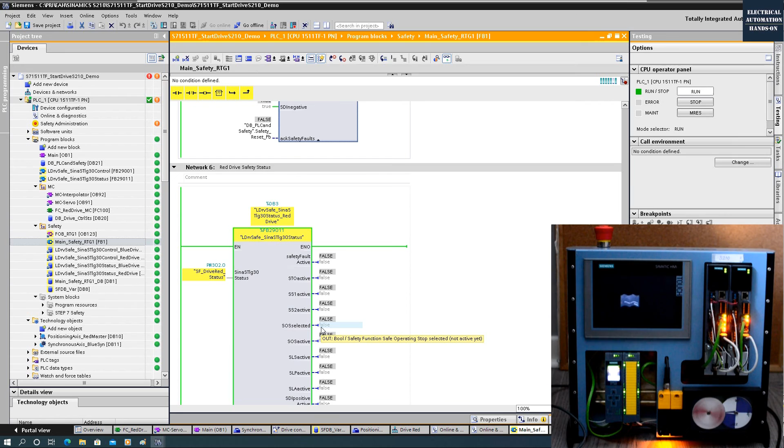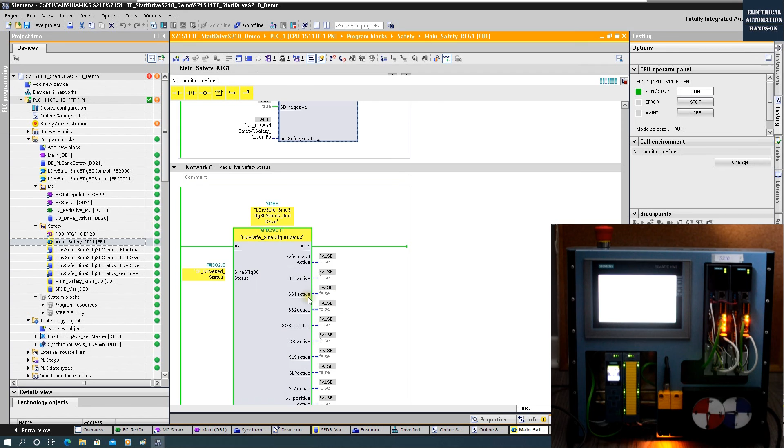Okay, now I will open the gate. Open. You will see in a short moment the drive is still moving. It's not immediately stopped. Okay, while the door is open, we will see the STO true, but the SS1 is still okay. So let's close. So once we close, if you recall, the gate switch does not need the acknowledge. As long as the signal goes on, the STO is okay.

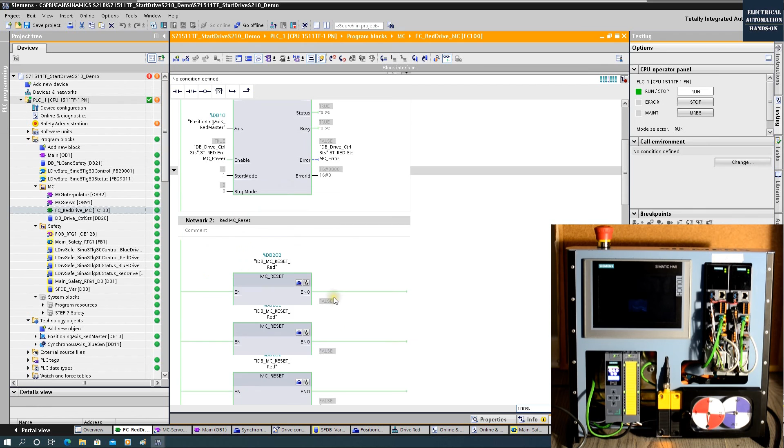Okay, now let's fire it again. So this time I will turn on the light to make this clear. Let me fire up the drive again. So click this reset. The axis needs to be reset. Okay, then let's power on the axis. Now let's go down to fire it up.

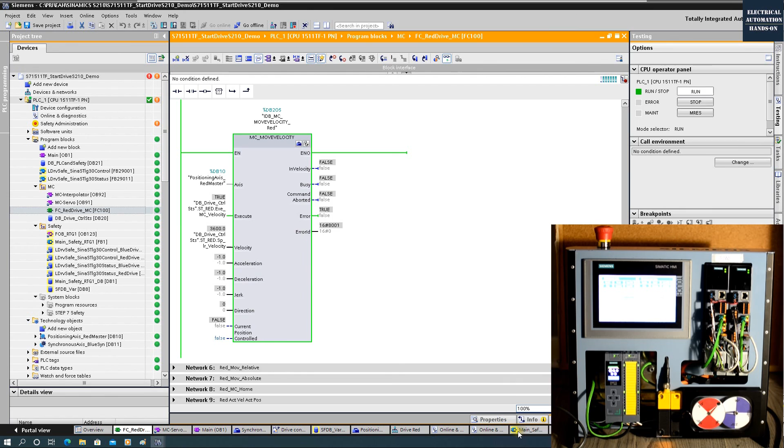Okay, the drive now is running, and if I hit the e-stop, we'll see the drive stop very quickly. Hit, and stop. Okay, release. Go to the safety, acknowledge this e-stop. Okay, we need to acknowledge. Okay, e-stop returned. And let's test again.

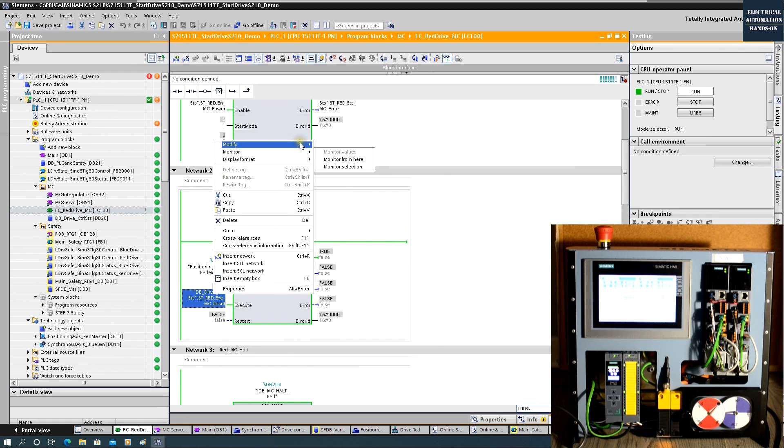So let's go to the axis control. Reset the error for the axis. Then power on again. And then let's go to the velocity, let's fire the velocity again. Okay, now it's running. Go back to the safety. And let's watch this status.

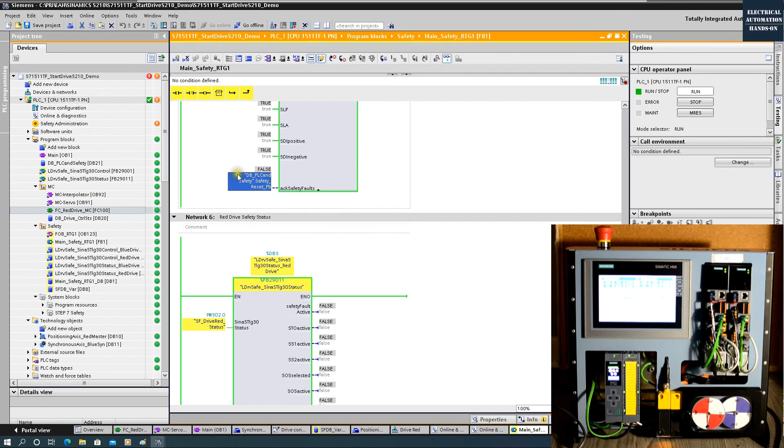Okay, this time I will open the gate again. So once I open the gate, I can see in a short period the drive coasts down. Okay, so let's do it again. Close the gate, return, and click the reset. Go back to the program. Reset the axis. Power up again. And this time we can run faster.

For example, I can set this command to 7200. Okay, and I can trigger. Okay, we run very fast. Now if I open the gate, we will see it coasts down, and once I open the gate, it needs a short period to totally stop. 1, 2, 3, open. So we see it roughly needs 1 more second to totally stop. Okay, so this is the STO and the SS1.

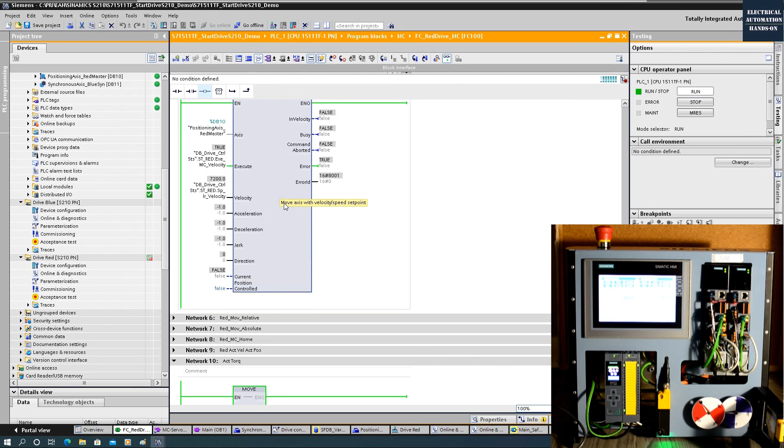And it is very important to implement this function into this drive system. I had one issue: at the early beginning, the system asked me to do the acceptance test for STO. I tried around 10 minutes to figure it out. Eventually, I found that as long as at the safety, at the early beginning, I make the system on, and then acknowledge the fault at the drive side, all those issues got solved. This is some experience I'd like to share here.

So the first time you implement the safety STO and SS1, it won't be super smooth. You need to acknowledge at the drive side first, then go back to the controller, back and forth a couple of times. And keep in mind, every time you change the safety parameter, don't forget to click this copy RAM to ROM, and cycle power after that to enable safety totally. Okay, this is the SINAMICS Drive S210 safety control, STO and SS1.